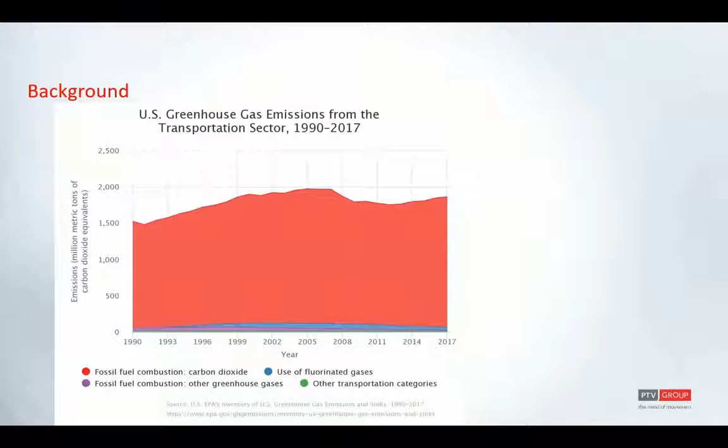Okay, so basically a little bit of background in emission. We do know that efforts in emission study is a global thing. It's not just a transportation thing. There are people who spend their entire career life working on emissions. There are people who spend a lot of man hours working on estimating emissions. But then, despite that, the studies that are done, for example, from the screen that you see, indicate that emission is actually still on the rise.

So studies also show that if we look specifically into greenhouse gas emissions, 82% of these emissions are CO2. And then out of that, about 29% are attributed to transportation sector. Now, if you do a quick math, you will then see that transportation sector contributes about 23.8% of the greenhouse gas emissions.

So there is also a study already done which indicates that despite transportation contributing about 23.8% of the emissions, the contribution from transportation is, however, on a decline. And this could be attributed to electric cars, better combustion engines, or just reduced VMTs on our roads.

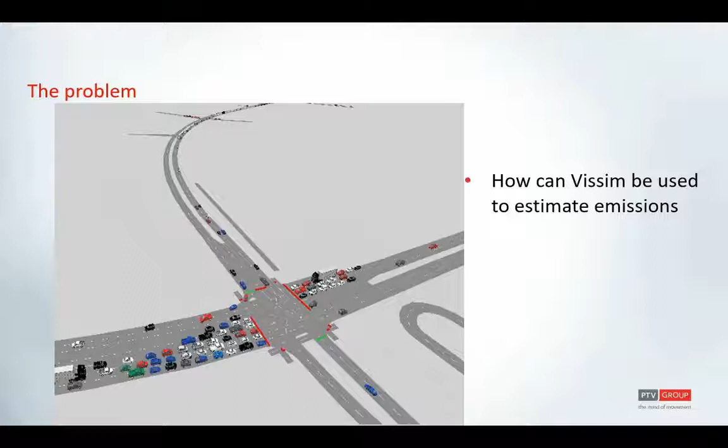But now the big question is, how can we use simulation to help with estimating or analyzing emissions in our transportation projects? Can simulation help? Or as transportation folks continue estimating delay, travel time, level of service, can we have emissions as well as one of the standard MOEs that is generated when you want to study the impact of infrastructure development in a neighborhood, for example? Can you have emission as a standard MOE when you want to study, for example, the impact of road diet?

So in my presentation, I'm going to explain real quick and simply how you can work with an external API and create an emission DLL, and then apply this external API in Vissim, pretty straightforward, to do an emission network analysis. So maybe you can estimate the total amount of emission in the entire network, and then how to use it to identify emission hotspots as well.

And then after that, how can you use it just to estimate emissions, say, of a particular vehicle type? For example, if you want to compare the emissions of CVs, AVs, or a mixed type of traffic, how can you do something like that? So how does the process work?

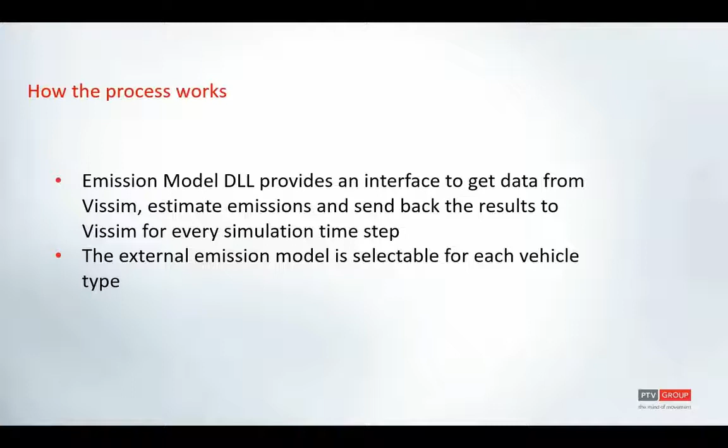In brief, you will need to create a DLL, and then you link your DLL to each vehicle type in Vissim. And then every single simulation step, the DLL will get information from your network and from your vehicles, and then it will apply the model specification, which I will show shortly how to create, and then estimate the emission every single time step, and then send it back to Vissim, and then through evaluation, Vissim generates the emissions as an output for every single simulation step.

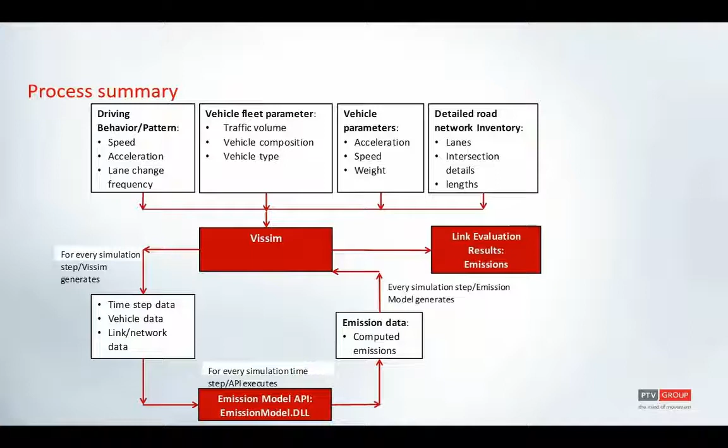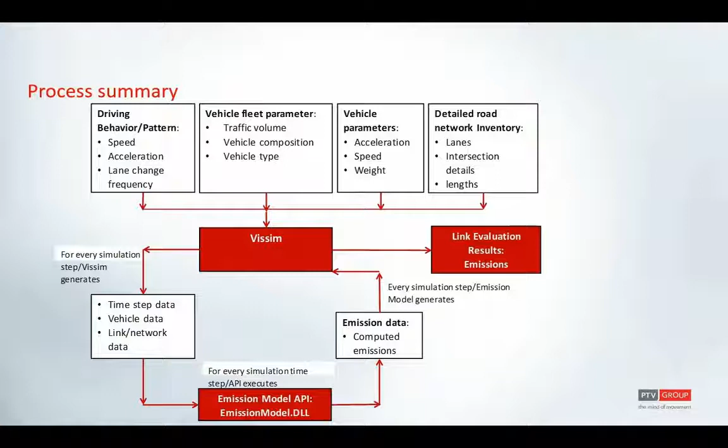If you do not want to generate it every single simulation step, you can then do an evaluation for an entire simulation, and then you have the emission generated for a single simulation run, in which the simulation time and the evaluation interval are the same. In that way, you just get the total emission at the end of the simulation. So let's look at the first step. How do you create the DLL and use it in Vissim?

First, for you to create the DLL, first things first, you have to have parameters. Parameters will be like your variables. What are these factors of the network or the vehicles or the driver behavior that will affect emissions? And then you must have a model specification. Now, the model specification will be the relationship that you have between the independent variable and the dependent variable, in which case the dependent variable will be the emissions.

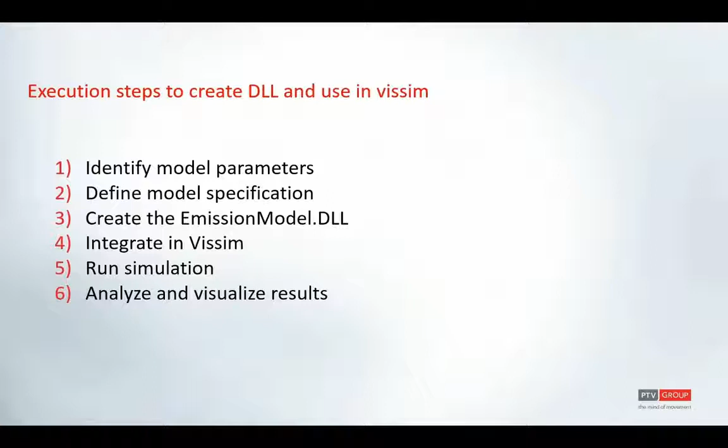And then you create the DLL based on the variables and the specification that you have. But in this case, you must make sure that your variables are those parameters that can be generated by Vissim itself in the network. Then you run your simulation, analyze and visualize your results.

So how can you do this in Vissim? If you go into the Vissim installation folder, you will have files to start with, so you don't have to build your DLL from scratch. In the installation folder, in the API, there will be the .cpp file, the header file, and the project file, which you can easily say, oh wow, I can just have something to start from. You don't have to start from scratch in creating everything.

So thanks to Lucas for making this available to users in the default installation folder. So we started from there, and then we make changes as we go on. So first we identify, brainstorming, what are the factors that will affect emission in Vissim? If you look, emission heavily depends on the vehicle operating mode. And the vehicle operating mode in Vissim, you would want to compare that to the psychophysical driver model or the states that are available in Vissim.

You can be in any of the 5 states: the free-flowing state, the car-following state, the approaching state, the braking state, or the collision state. Each state would generate a different type of emissions. If you are familiar with MOVES as an emission software, you know that the operating mode in MOVES is always about cruise, idling, braking, and then accelerating. And then after that, you need to make sure that your network is well calibrated in the Vissim model that you are working with.

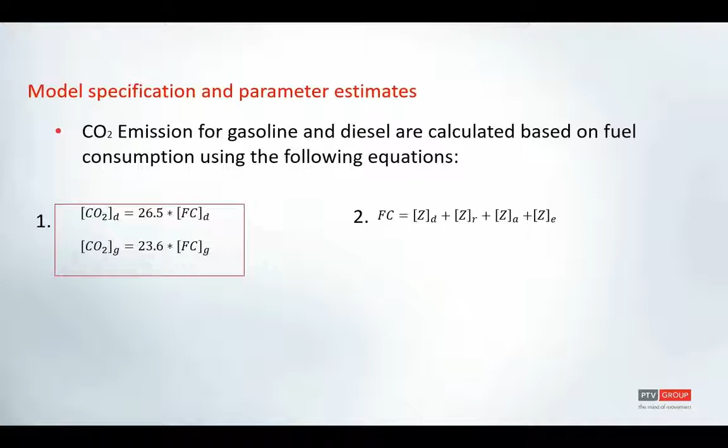So we want to take these parameter estimates and then implement it in a DLL, and then link that DLL to our vehicle types within Vissim. So basically, we will do that beginning with the files that are available in Visual Studio platform, in which case you first will need to define every variable that you are using. Once you define the variables, you must appropriately ask Vissim to make this data available by returning it.

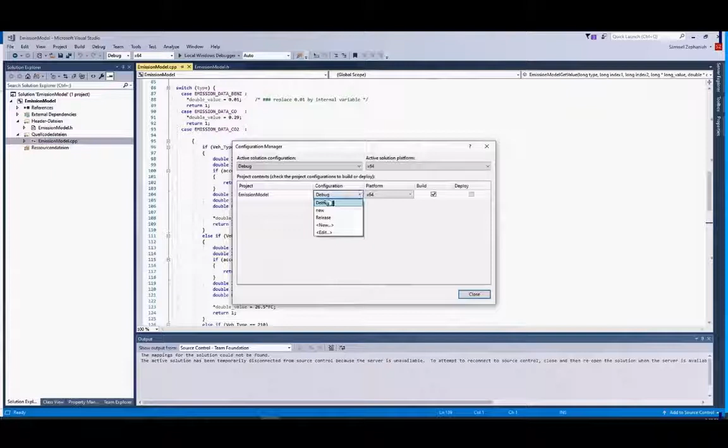So when you finally build your solution, you'll go to the build tab and then just run build solution, and if it's successfully done, you will see an indication at the bottom that one successfully built. If it's not built, it will tell you not built, and then you have to start troubleshooting the errors one by one. Of course, before I built it, I got a number of errors, especially if you don't identify your variable types appropriately.

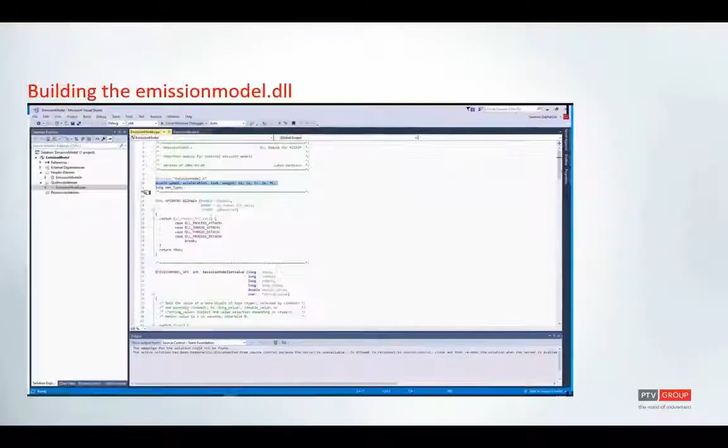So once the DLL is built, the next step will be, how do we apply that DLL in Vissim? If you go to the debug folder, that's the folder name I use, you will get the .dll API saved there. So I'm going to work with an example file which is available in our installation folders as well. It's a corridor with 6 signalized intersections in San Antonio, Texas. So in this use case, we are going to apply that to estimate CO2 emissions.

So one, let's look at what are the parameters that you have to be cognizant about in Vissim. One, you have to be aware of the weight distribution of the vehicles. If you have this information, you go to base data and make sure that you have the weight appropriately coded in with the right distribution, because the emission will pull stochastically the weights of each vehicle that gets into the network.

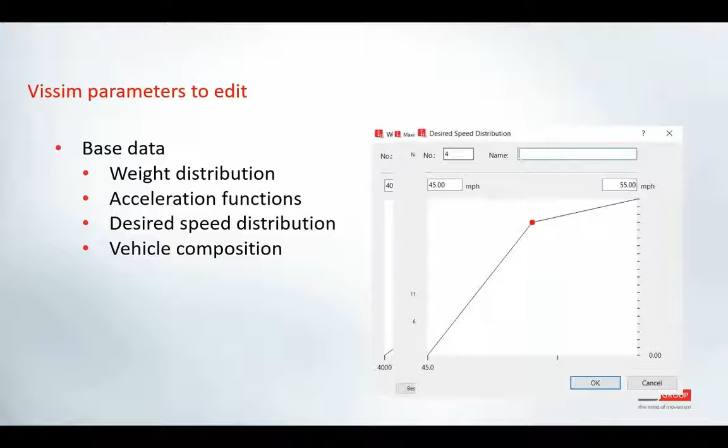And then after that, you want to be also aware of the acceleration functions by going to base data and making sure that the desired acceleration and maximum acceleration are appropriately coded in your network. You also want to make sure you have your desired speed distribution appropriately coded, because these are the information that are emission intensive. And then you need to go into vehicle type for each vehicle that you're working with, and under the special tab you will put the link for the emission DLL under the area that's highlighted in red.

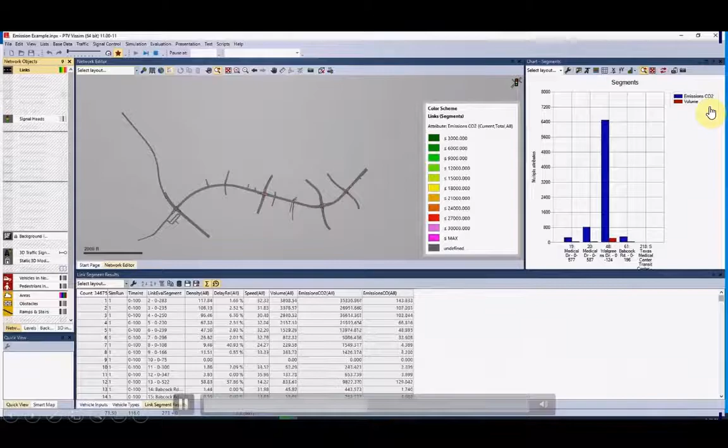So after that, you can then choose if you have any specific interest in a link that you are studying. You can have also a graphical display of the bar charts, as you see on the right side, that will compare. For example, in this case, we are comparing the CO2 emissions with the volume of the vehicles in the network. You can then also do a network hotspot visualization, where as the simulation runs, you will see your network changing.

Of course, to do hotspot visualization, you have to activate your link evaluation, and then you will need to go to the type of link attribute that you want to be displayed as a hotspot. Then under the link attributes, you have to choose emission as your link attribute. And when you choose emission as the link attribute and the rate at which you want it to be displayed, then you also choose the bar for the legend for the display, as you can see here as well. Then it will simply show you where the emission hotspots are and what attributes are responsible for the emission hotspot.

And then the other part that people never look at, I would encourage you to also identify where the emission low spots are and what the attributes for the emission low spots are. Why is it different from the emission hotspots? So that's pretty much as easy as it is. And with doing this, you will be able to use the emission DLL, create an emission API, and then estimate emissions, and then it can be one of the MOEs when you want to do a project impact analysis of infrastructure development or road diet, for example.

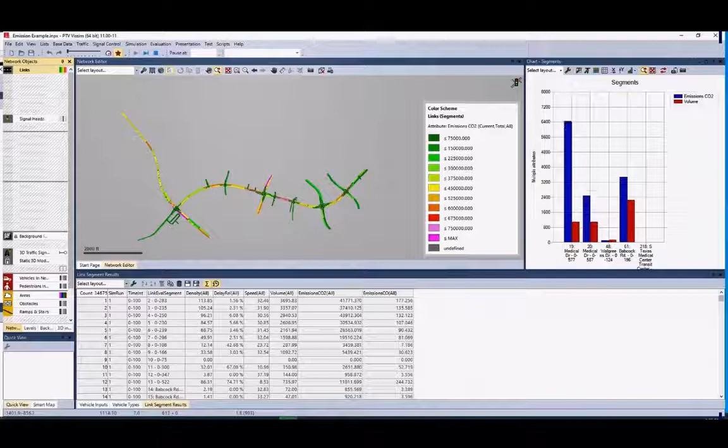Yeah. So for this to work for you, you will need to have the emission module extension in Vissim. So if you try working on this and you don't have the emission module extension checked in your license, then it will not work and you will start getting concerned. So before you send a support request, check that you have the emission module activated. If you don't have it activated, then you can get information on how to have it activated. And that's as easy as it can get. So any questions?

Yeah. Okay. So actually, I have two questions. First one is, so this is done for links, right? Yes. Do you have plans in future to do second-by-second activity? And the second question is, your emissions are based on the fuel consumption, I guess, right? But the fuel consumption was not necessarily reported as an output.

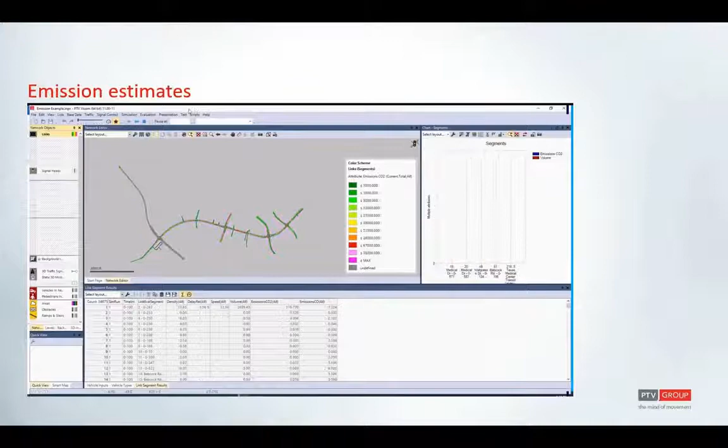So we put this script in the DLL, then it pulls the information from Vissim, and first estimates the coefficients, and then based on this study at the Montreal University in Canada, it sums up these parameters to get the fuel consumption. So fuel consumption is not given out as an output for this particular study. It can be. Given as an output, but right now it's not, right? Yep. That's what you're saying. Yeah, now it's not.

And the second question was, considering that this is for a link, do you have plans to have it for individual vehicles based on their movements as they go through the network? That's actually already available, because if you go to vehicle records and then you go to direct output and then you choose every vehicle type that you want, and then under that column on direct output you will go to attributes. It's normally bottom left.

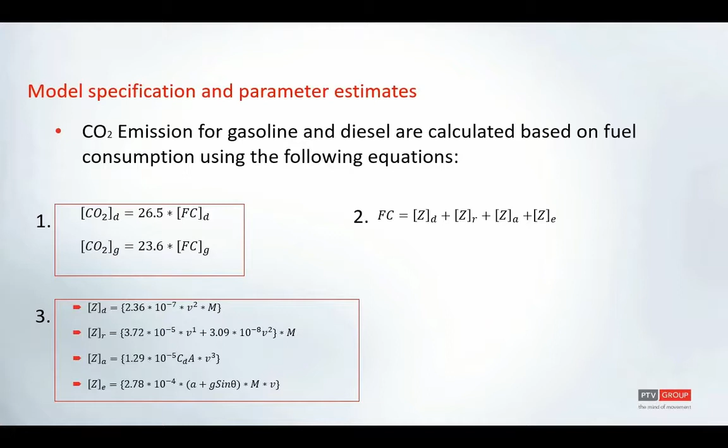But that was like 4 years ago or so, and then we added that smooth close-up functionality, and at least they were then content with the trajectories. So they said, now we can use it for our emission calculations and it's fine. So that, in a way, might answer your question. We hope it is good enough now.